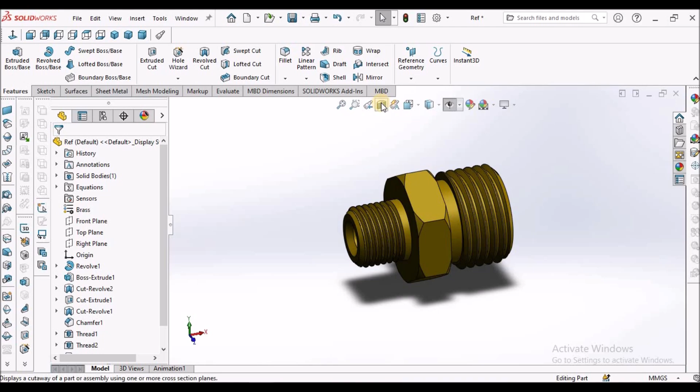I've taken a new SolidWorks part file. Select the front plane, go to sketch, draw one center line, draw one line from the origin vertically, and this value is 10 mm.

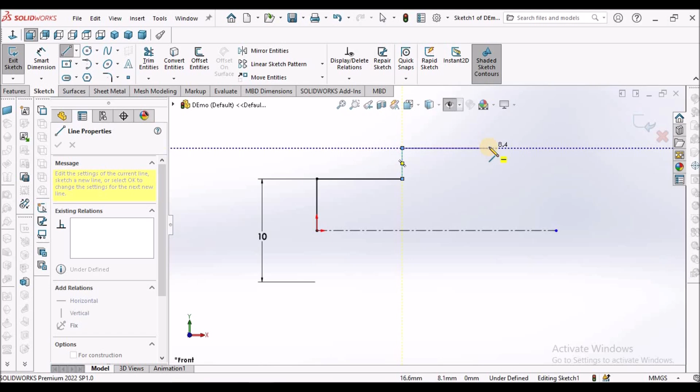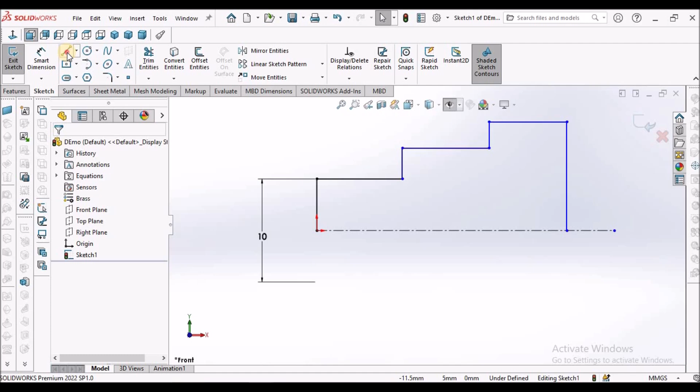So I am going to create a revolve feature. Let us coincide with this, and I am closing the loop. See, when we close the loop, it shows the shaded form.

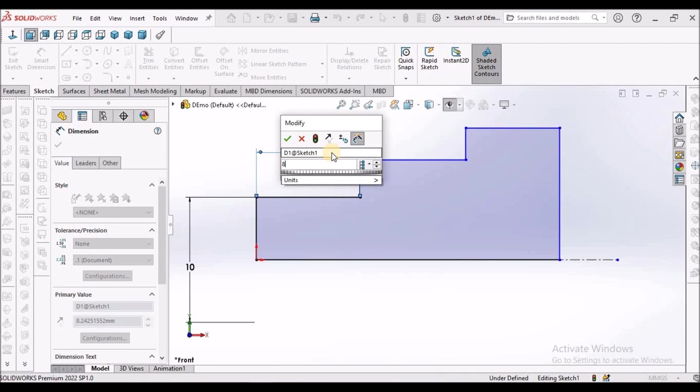If you select this option, this is better. If the loop is open, it doesn't show this shaded form. So this is the advantage of shaded sketch contour, so we can use this option. This is 8.5, this is 8, and once again this is 8.5.

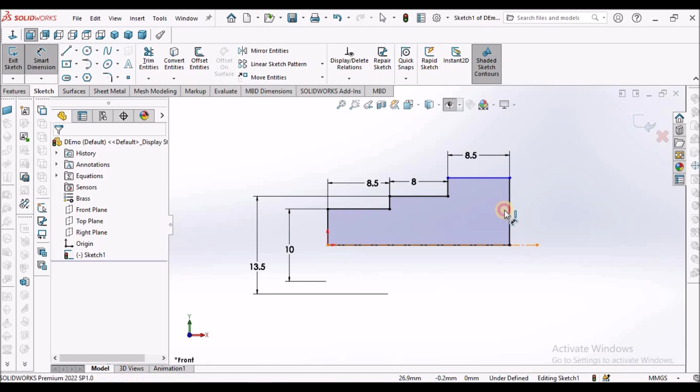This value is 13.5. So these are the diameters. This is 16. Now I am going to select the revolve feature and say OK.

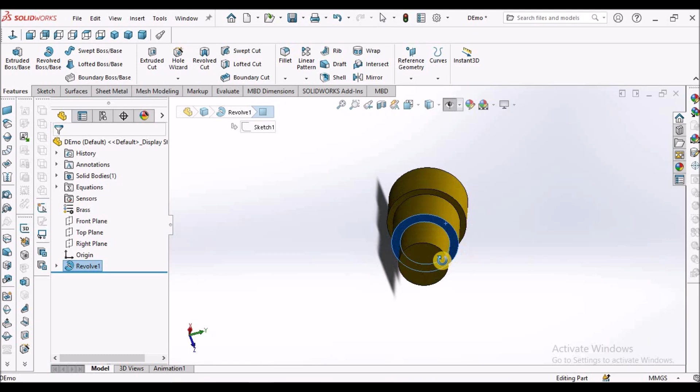Now select the face, go to sketch, draw one polygon with 6 sides, that is a hexagon.

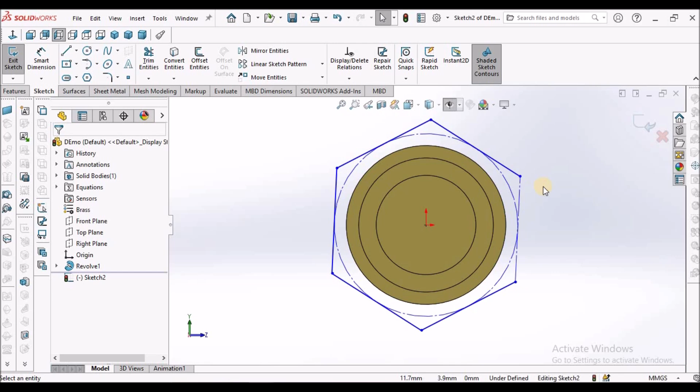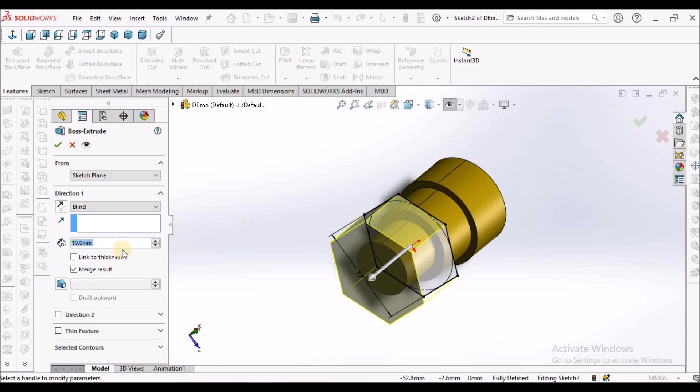Select this and select the vertical constraint, so this is vertically defined. Now select these two lines, and this value is 17, so it is fully constrained now. Now I am going to select the extrude boss, this is 5.5, flip this arrow and say OK.

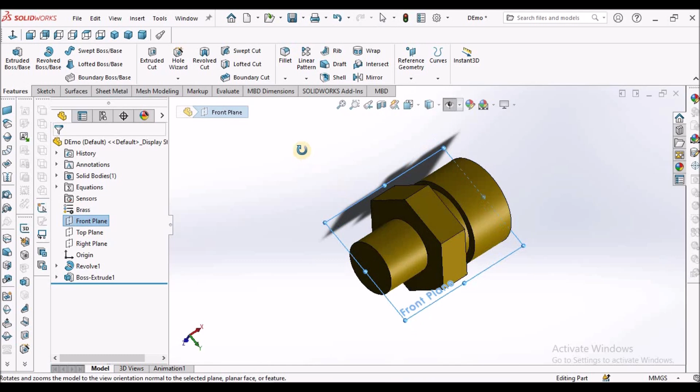Now select the front plane. Make sure that the sharp edges are parallel to this front plane. Select this front plane and go to sketch. For better visibility, keep it in wireframe.

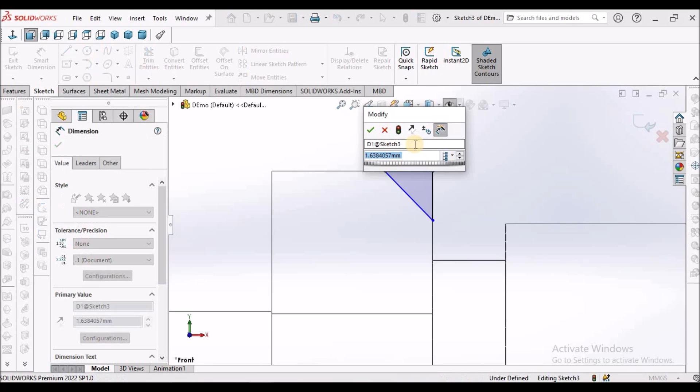Now draw one triangle. This value is 1 mm. Now select these two lines and make it equal, so this is fully constrained now.

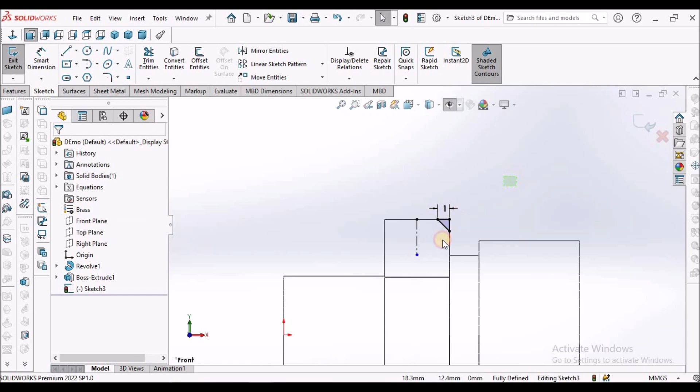So we have to mirror this. I am going to use one small line vertically, select these three lines, select mirror entities, and mirror about this center line.

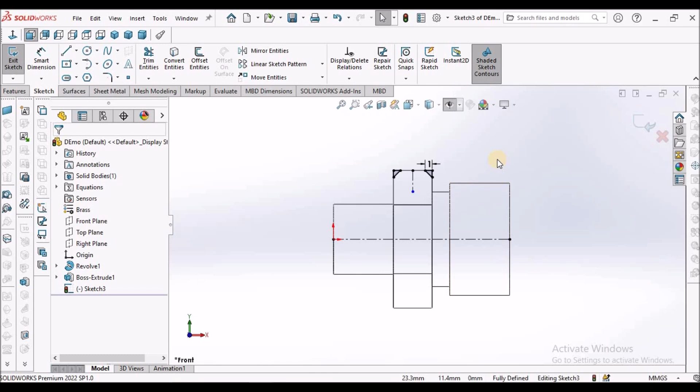Now I am going to draw this center line, this is for the revolve feature. So go to revolve cut. Here we have to select the revolving axis of this horizontal line, so this is very much important, and say OK.

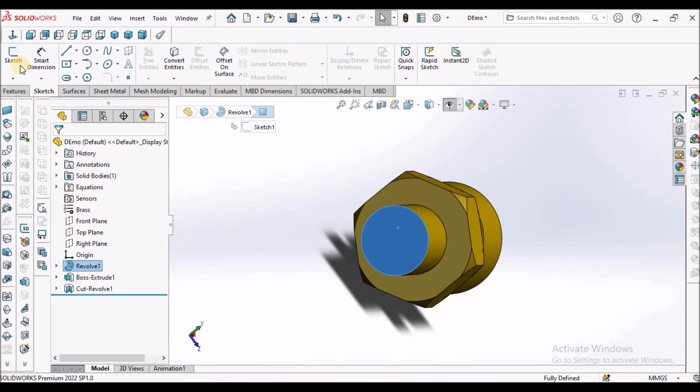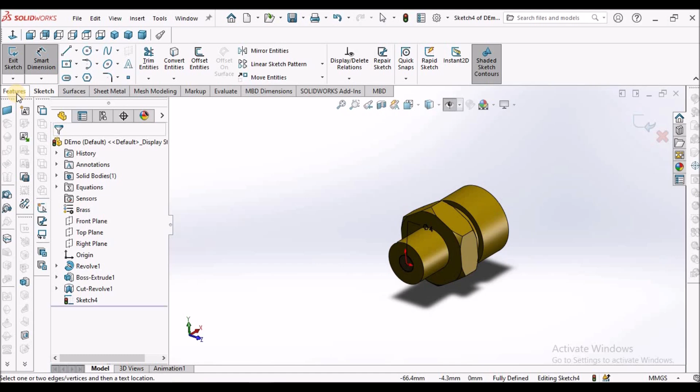See here. Now select this face, go to sketch, draw one circle, this is 4. Go to feature, select extrude, select through all, and say OK.

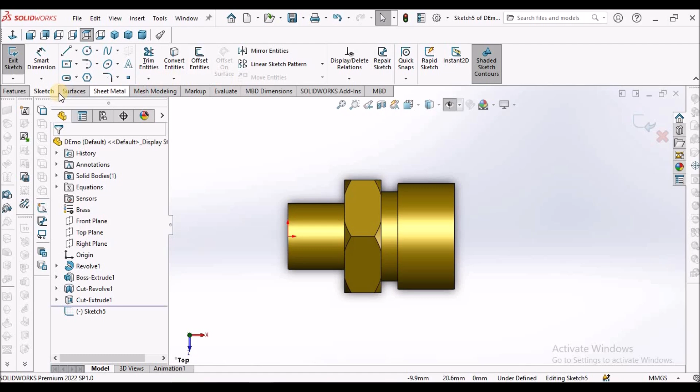See here. Now select the top plane, go to sketch. So we have to draw one revolve feature, keep it in wireframe. Draw one center line.

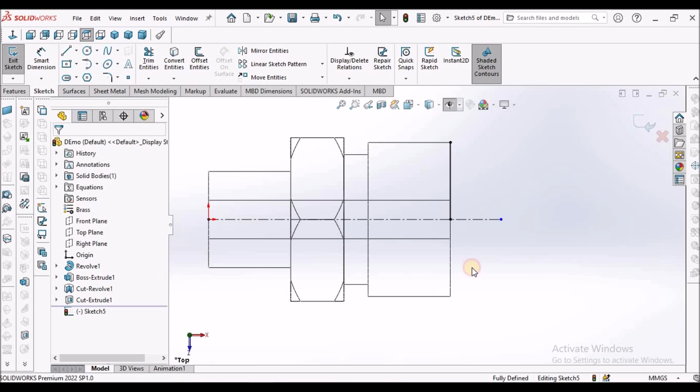Select this edge, convert entity. Move this point to this center line, and move this point a little bit down, and draw one horizontal line, inclined line and vertical line, then close this loop horizontally.

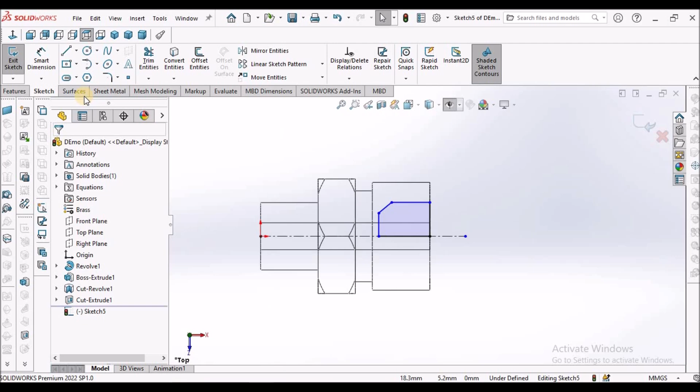See, this loop is closed, you can see the shaded form. Now we have to assign dimensions.

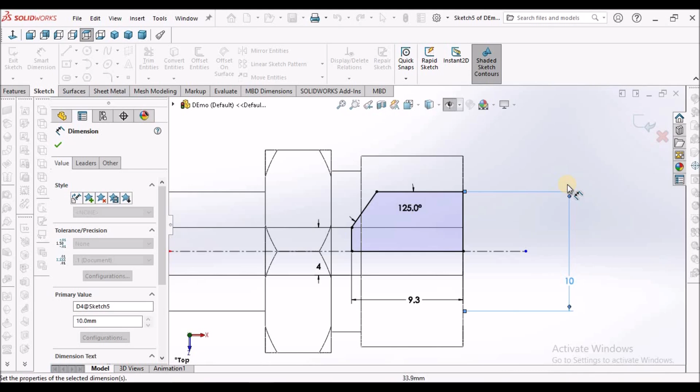Select these two lines and this angle is 125, and this is 9.3, and this is 4. This is 10, and go to revolve cut, and say OK.

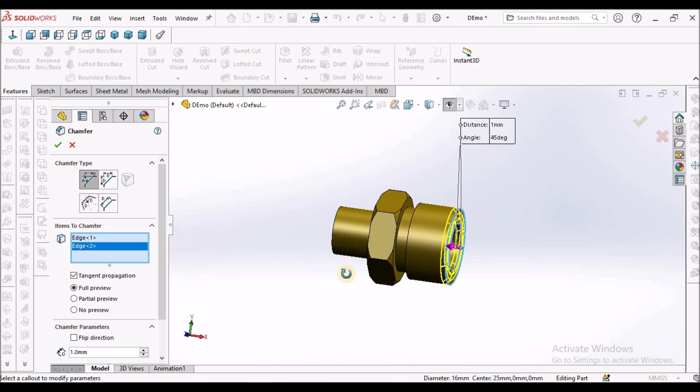See here. Now I am going to apply chamfer. Select the chamfer command. Select these two edges, so we have to reduce the value, that is 1 mm, and this edge and this edge. These 4 edges we have to select.

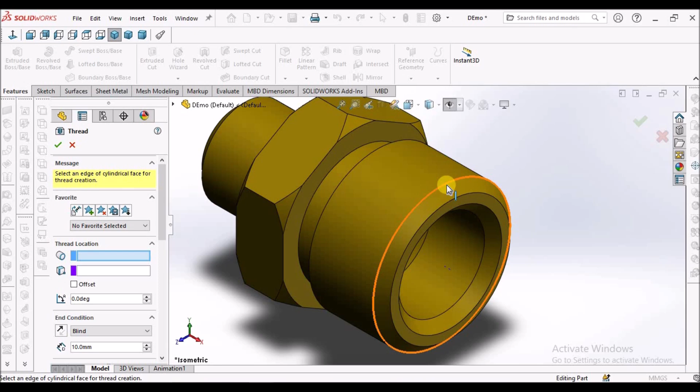See here. Now I am going to apply these thread features. Select thread command, and select this edge. I'll say OK, and after that I'm going to explain.

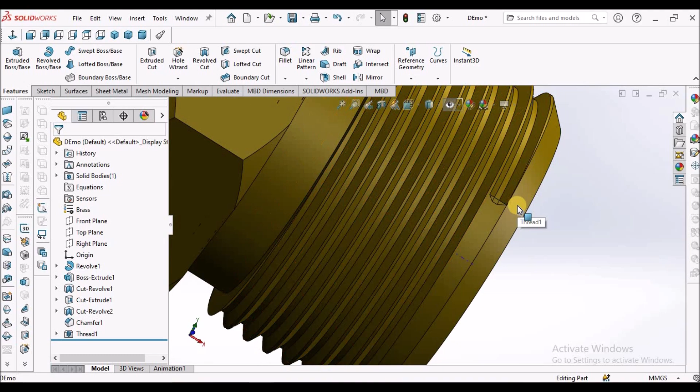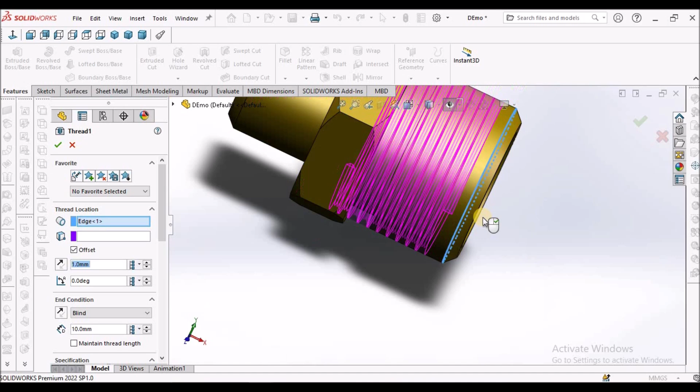See here, it is starting from here, we can see this thread. See here, it is starting from here, so which is not feasible. So what we have to do is, we have to apply offset and flip the direction, and this is 2 mm.

And the blind value of 10, and see here specification type, we have to select the metric die. We have to select the metric die, and since the diameter is 16, we have to select 16 into 1.5.

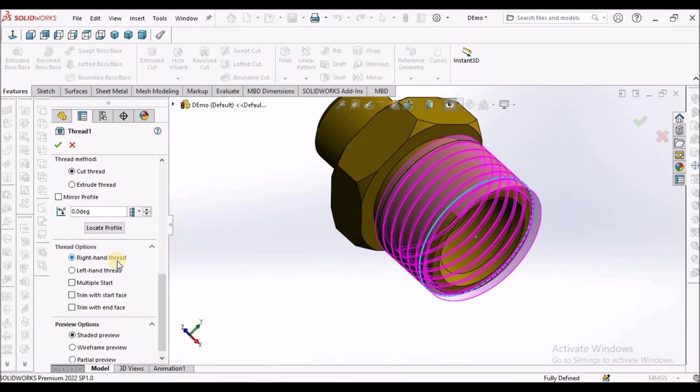And we have to keep thread method as cut thread, and thread option right handed thread, and say OK. See here, you can see this thread now, so there is a smooth transition in the cutout, so that is very much important. See here.

Now I am going to create a thread feature for the inside diameter. See, we have to see this diameter, we have to remember also. We can see the downward diameter is 10 mm.

When we click this edge, we can see the diameter at this point, exactly at the bottom, so that is 10 mm. We can remember, or we can simply select this edge and identify the diameter. Now I am going to apply the thread command.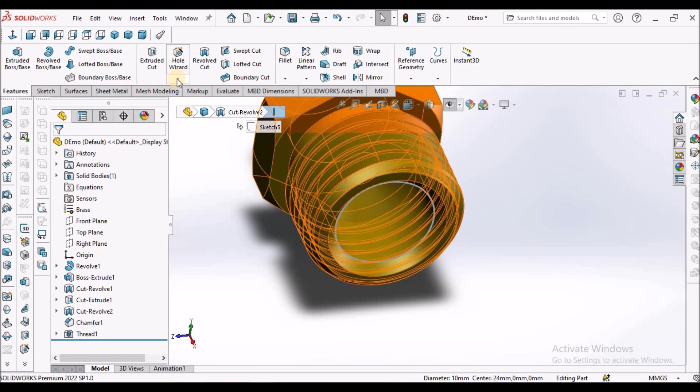Similarly, we have to select offset and flip the direction, and the blind value we can keep at 7 mm, and here we have to select the metric tap.

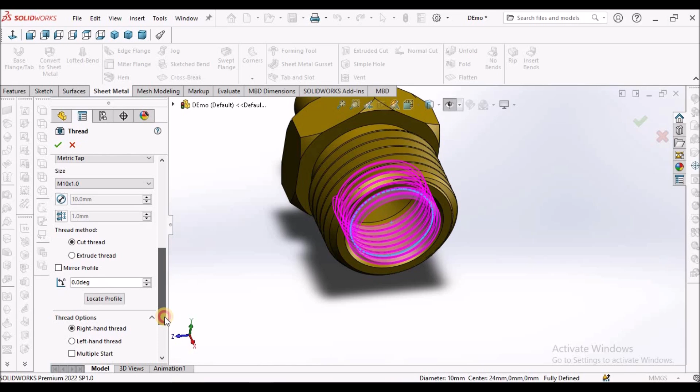And since the diameter is 10, we have to select M10 into 1, that is the pitch value, and here thread method we have to select cut thread and a right handed thread, and say OK. See here, this is the feature created.

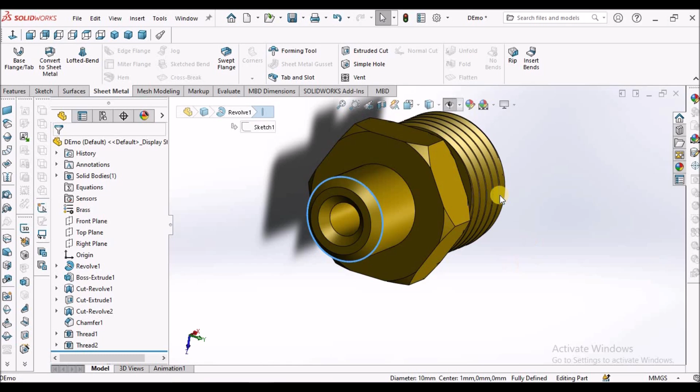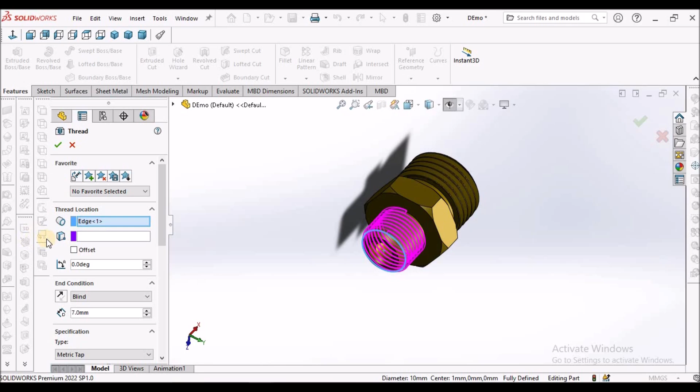Now we have to apply thread at this location, so select this edge, this is also 10 mm, so we have to go to thread feature. We have already selected this edge, and similarly we have to select offset and flip the direction.

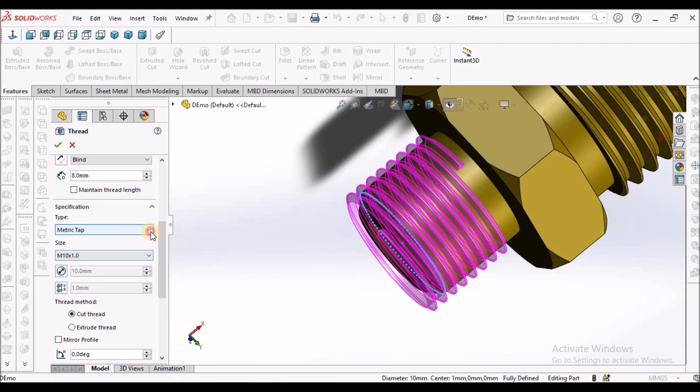See, it is moving in this direction, we have to flip this, so select opposite direction. Now the blind value I am going to take 8 mm. Next, metric tap M10. We have to select metric die and M10, and thread method cut thread, and say OK.

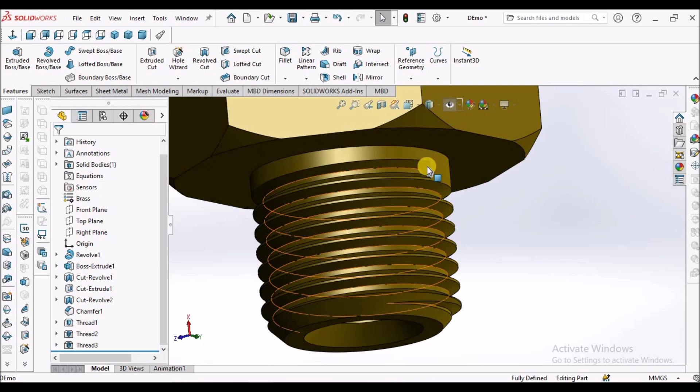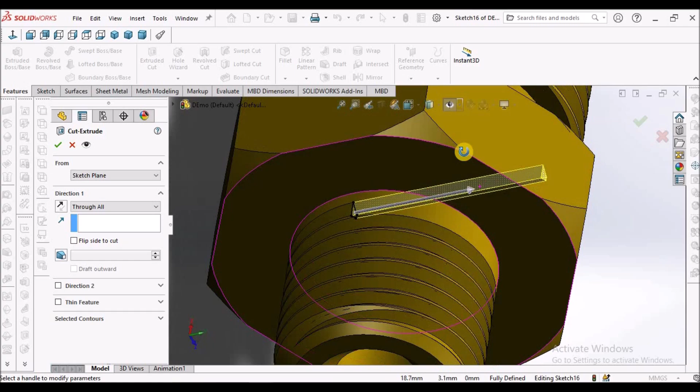See here we can see there is no smooth transition of the cut. Select this face, go to sketch, and select convert entity, go to features and select extrude cut. See here, so there is no interference at any place, so we can take any value, so I am taking through all, and say OK.

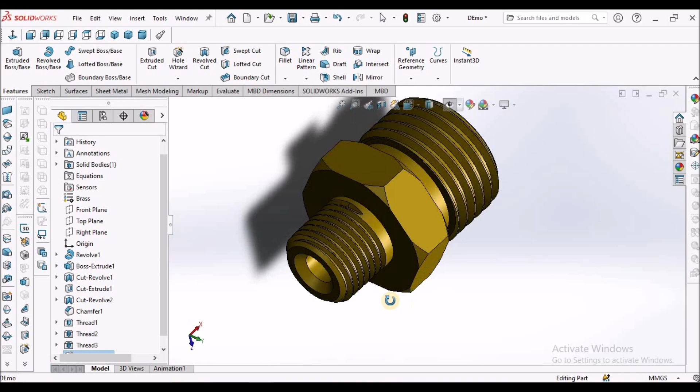See here, there is a smooth transition. So this is how we create the thread feature. So this final component is ready now. I'm going to show you the cross section of this. See, this is how it looks internally.

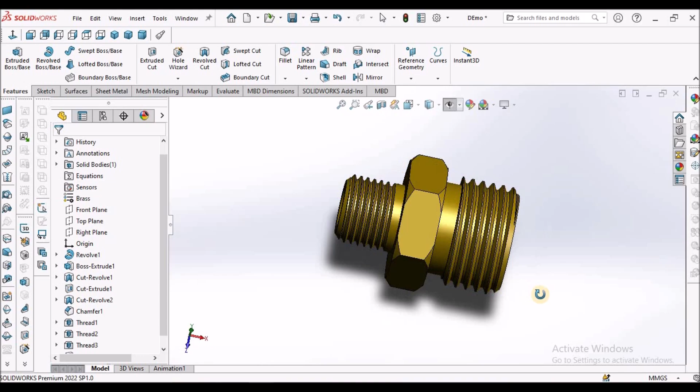So this is brief about brass fitting transfer adapter in SolidWorks.